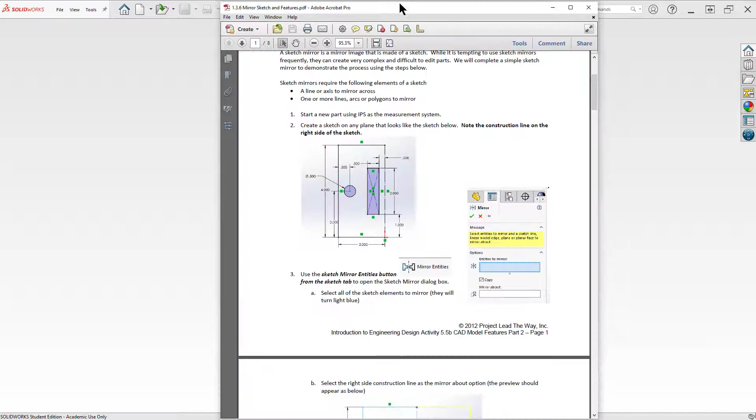We're going to start out by sketching this part right here, just making this little sketch. Now we want to be in inch-pound seconds, and all that a sketch mirror requires is a line or axis to mirror across, and then one or more lines, arcs, or polygons to mirror. So it's really a pretty simple process.

I'm going to go ahead and start File, New Part. I'm going to start a sketch, any plane. I'll choose the front plane. I'm going to go ahead and use a corner rectangle, start at my origin, pull it up and out, and get this thing fully dimensioned.

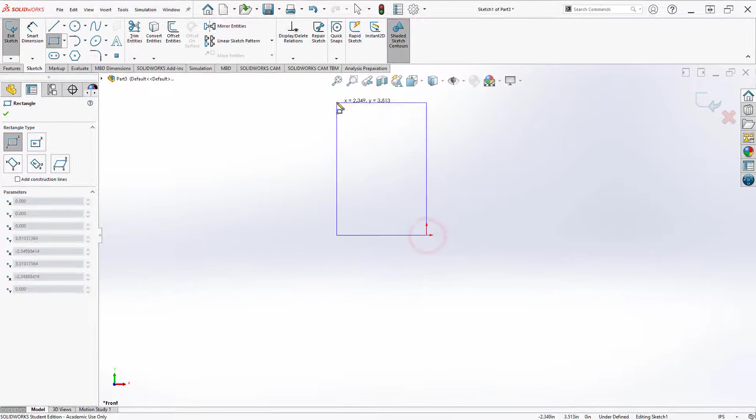I want to do my largest dimension first, that's about 4 inches. I want this dimension to be 2 inches. And I want this line to be for construction. I can click on it and choose construction geometry right here.

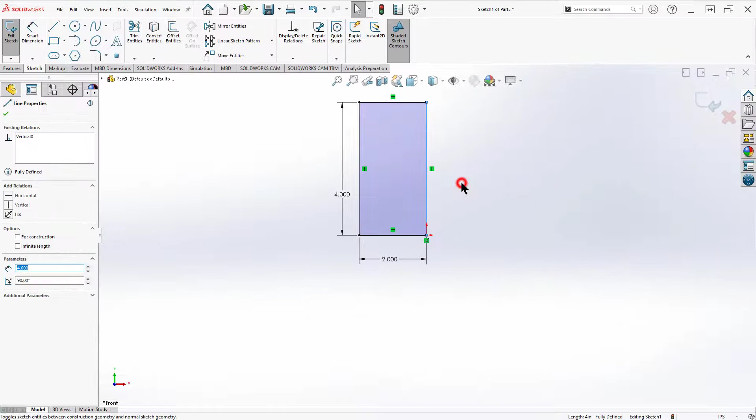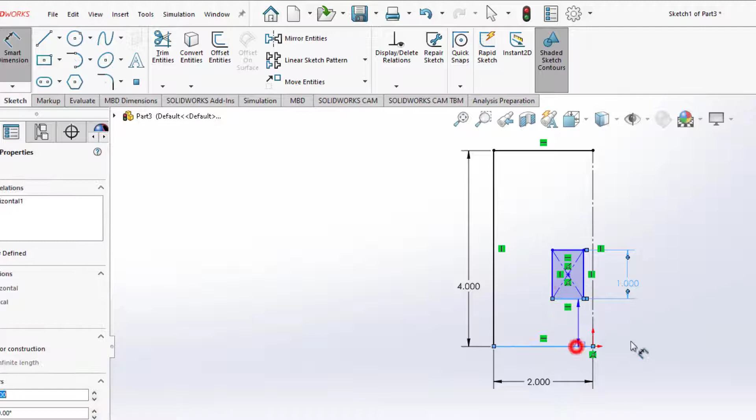I'm going to put a second rectangle. Let's make that a center rectangle, and I'm just going to drop it kind of up in here. Apply a couple of dimensions to that. I want this to be 2 inches tall. I want it to be 1 inch from the bottom. And I just said 2 and I typed in 1. So my bad, I'll fix that.

Should be 2 inches. I want it to be about 1/2 inch wide. And I want it to be about 1/4 inch from my construction line. And I just messed that one up. Hang on a second here. I want to go actually from my construction line to here, 1/4 inch.

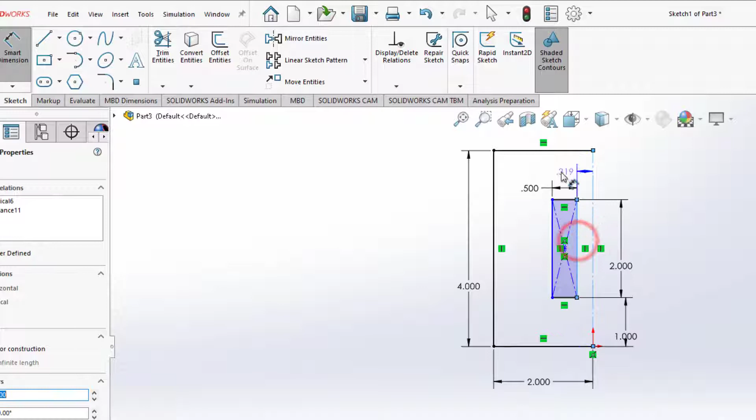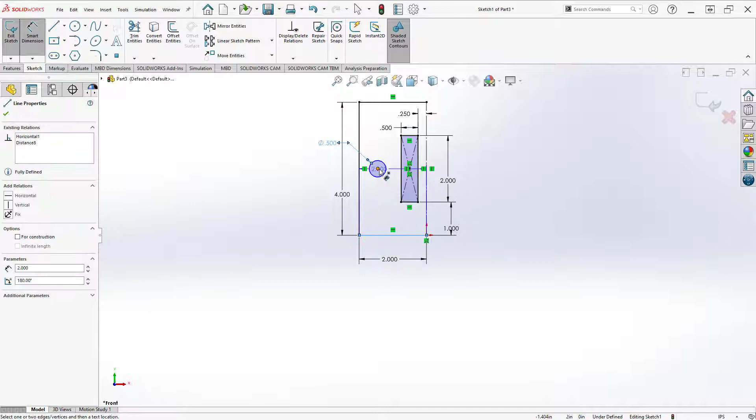Okay, you're going to notice that my sketch is almost done. I want to put one more circle in here, just going to drop this down, dimension the size of this, 1/2 inch. And I want to place it so that it is about in the middle of that, 2 inches up, and 1/2 inch from the edge to the center of my circle.

Now you're going to notice that my sketch is fully defined. We always want to get our sketches fully defined. Remember, we need a size and location for pretty much everything. So now you can see that I can take this simple sketch and I can mirror it.

To do that, in the Sketch tab, so that's an important thing because the menu looks very similar in the Feature tab, but in the Sketch tab, in an active sketch, I can come up here and select Mirror Entities. Now, when I select Mirror Entities, I get this dialog box.

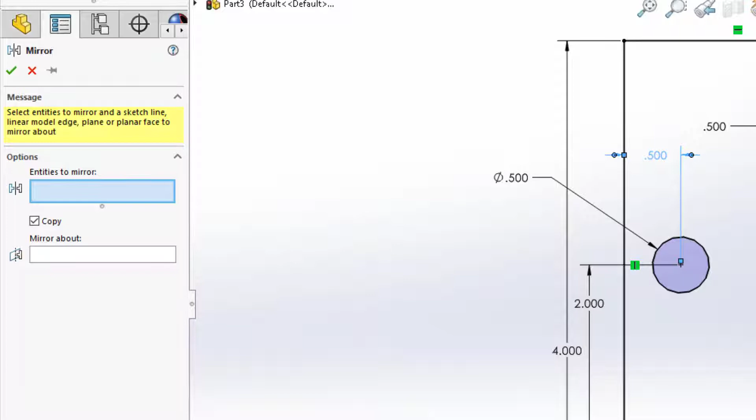First thing it says is, what do I want to mirror? Now, I can go through and I can click these things one at a time. I'm just holding down my Control key and clicking them. It's one way to select it. Kind of painful. So there I've got everything.

But I'm going to show you an even easier way to do that. I'm going to hit Escape, go back, hit my Mirror Entities, and I'm going to drag up and left. Everything that I touch with that box gets picked. Now I don't want to necessarily mirror this middle line here, so I'm going to hold the Control key down and deselect that. Everything's light blue that's selected.

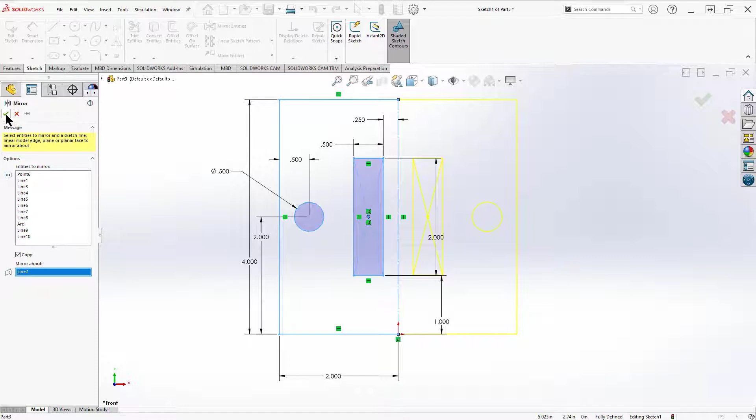Now the mirror axis, the axis that I'm going to mirror about is going to be this construction line. So I've just moved my cursor from my upper box, Entities to Mirror, down to Mirror About. Clicking that, you'll notice I get a preview. Now it's light yellow and kind of hard to see on the screen, but I have a preview of everything I'm going to mirror. I want to be sure that's pretty accurate because it's kind of hard to reverse this. Hit the check mark, and now I've got a mirrored sketch.

And at first glance, it looks pretty good. But one thing that I want to point out to you is you'll see all of these mirror entities. As I hover over them, I can see where the mirror is coming from. But you're going to notice a couple things.

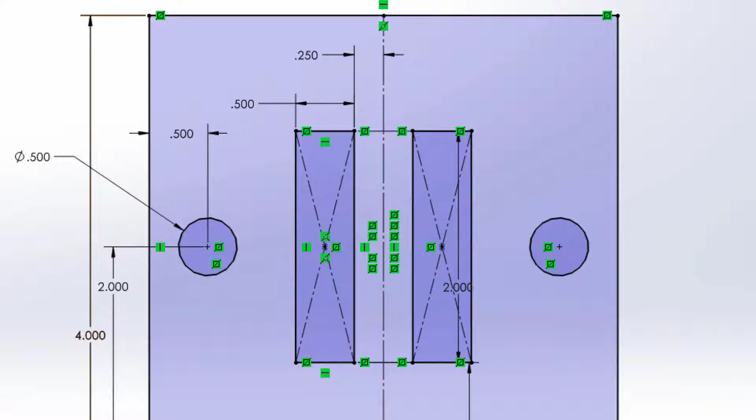If I change a dimension over here on the thing that's being mirrored, 0.75, it'll update it on both sides. But if I come over here to the item that's mirrored, and I try and do a dimension, it'll tell me it's a driven dimension and highlight the other side. So it can be kind of hard to edit these sketches that are mirrored. For that reason, I will tell you that it's probably not the best strategy overall to do complicated mirror sketches. But we can do that.

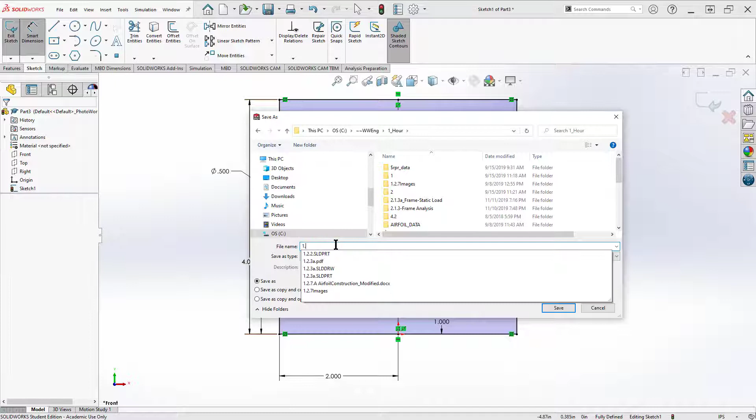All right, that's a sketch mirror, pretty straightforward. Let's start something new.

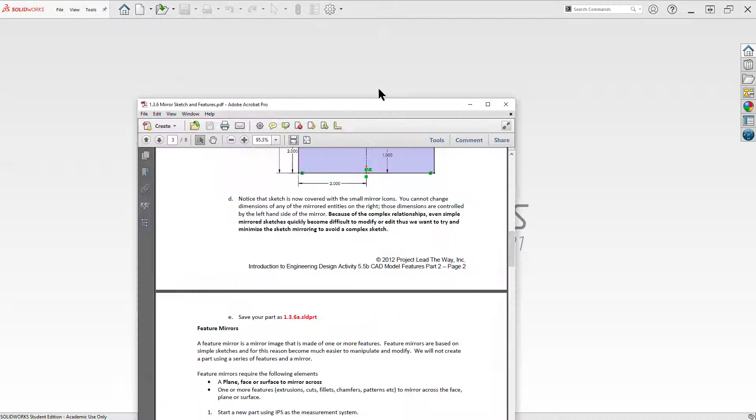This time I can do a similar operation, but instead of mirroring parts of my sketch, I can mirror complete features. This is kind of tricky because a feature mirror is much more powerful. I can mirror across planes, faces, or surfaces, really a flat surface, across any feature—an extrusion, cut, fillet, chamfer, pattern, etc. Doesn't really matter.

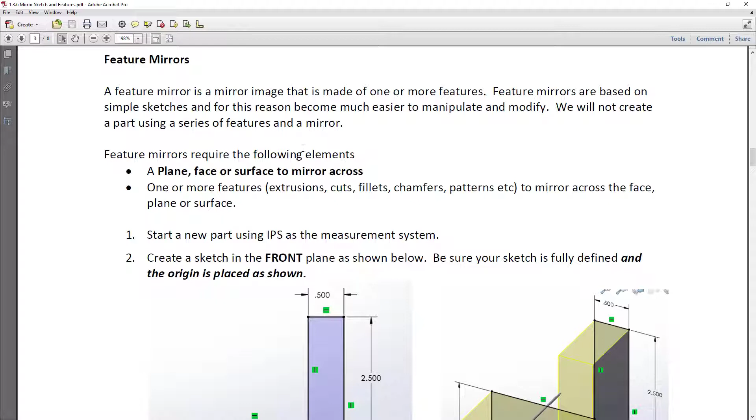So we're going to start a new part. This time I want you to pay attention and choose the front plane. We're going to make sure our sketch is fully defined, and the origin is down here in the lower right corner. You'll see why in just a second. So let's draw this little L.

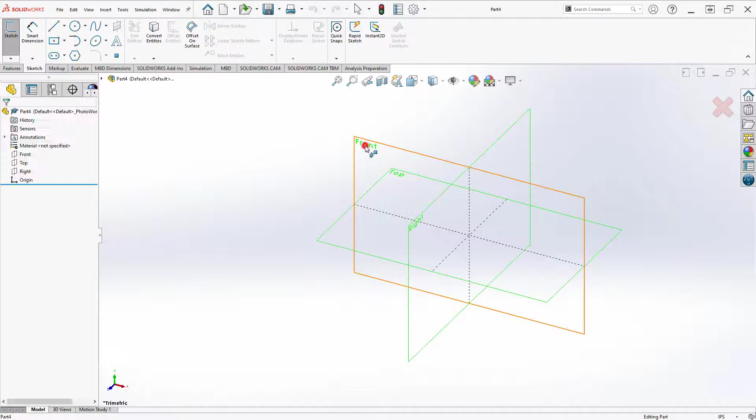Again, File, New Part. I'm going to grab my line tool, sketch in the front plane, and draw a little bitty L. I want it to be vertical, horizontal, vertical, horizontal, lined up to my origin, and be a closed body. Notice my origin is down here in the lower right corner.

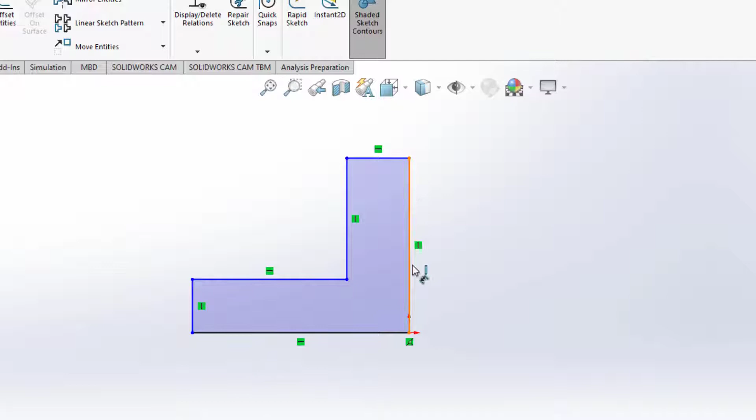Couple dimensions: biggest dimension 2.5 right here, then 2, then 1. Don't worry if it blows up a little bit, grab it and I'll pull it apart. And 0.5.

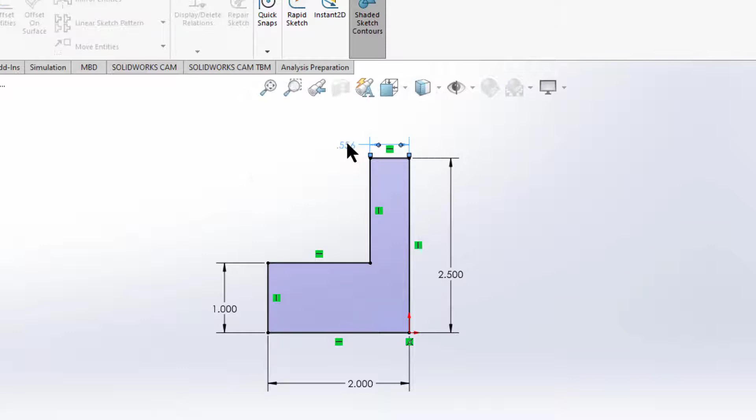Fully defined, looks awesome. I'm going to go ahead and extrude this 1 inch blind straight out. So go Features, Extruded Boss Base, 1 inch. Preview looks good, accept it. This is my extruded part.

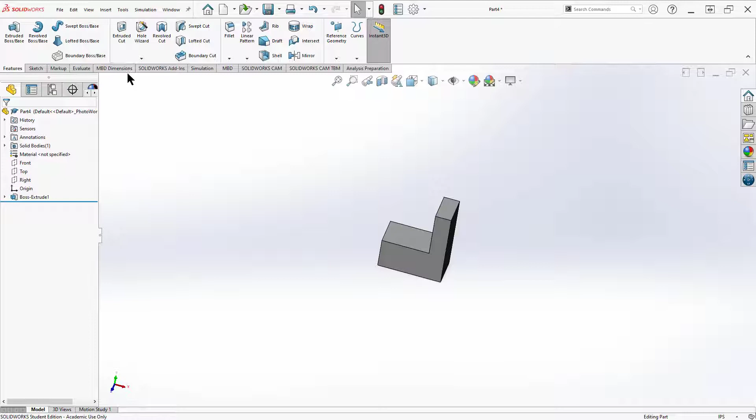Now I want to modify this part a little bit. The first thing I'm going to do is put an extruded cut in the top, with a circle on top. I'm sketching on that using my circle tool, but I want you to learn how to do this properly.

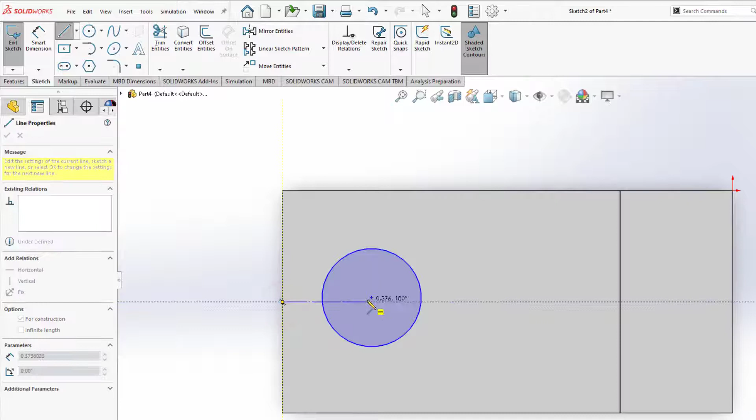I'm going to use a center line to position my circle. Every line has 2 endpoints and a midpoint. I want this to be in the middle of the object, so I'll find that midpoint, put a center line out to my circle, and make that line horizontal. I'm also going to use this line to dimension the location, and I'll make that 0.750.

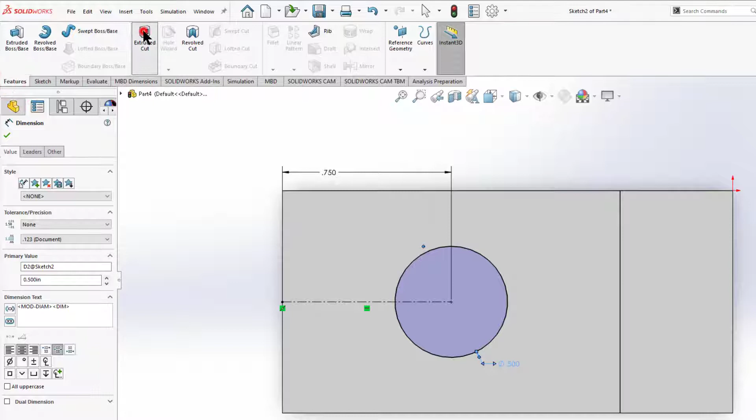And I'll make my circle diameter 0.5. I'm going to go ahead and cut that through all. So now I've got this basic shape.

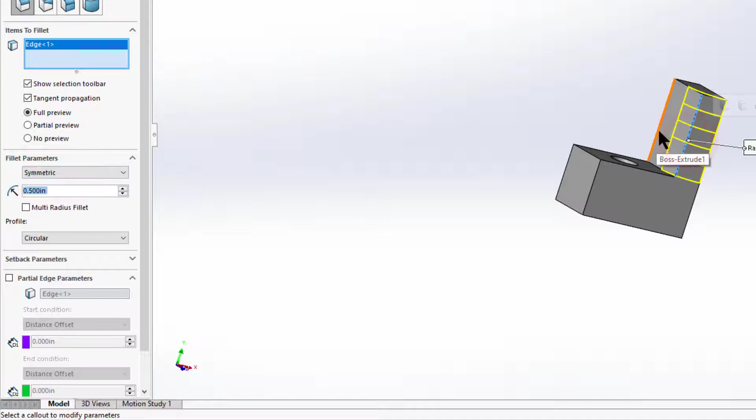One more quick thing I want to do is add a couple of fillets. Grab my fillet tool, set the dimension of my fillet to 0.5, and choose this upper 2 edges, just like that, and the far left 2 edges, just like that. You'll notice it makes that round—another way to make something round. You'll only see that if you have full preview selected.

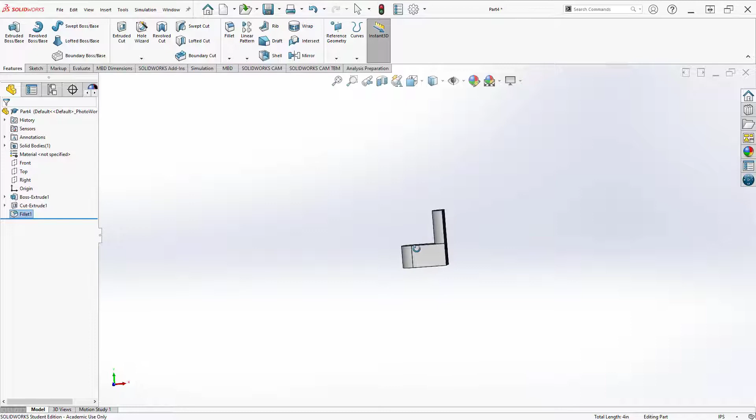So now I've got my part. Now I'm going to mirror this part. To mirror the part, notice now I'm in the Features tab, and I come up here and choose the Feature Mirror.

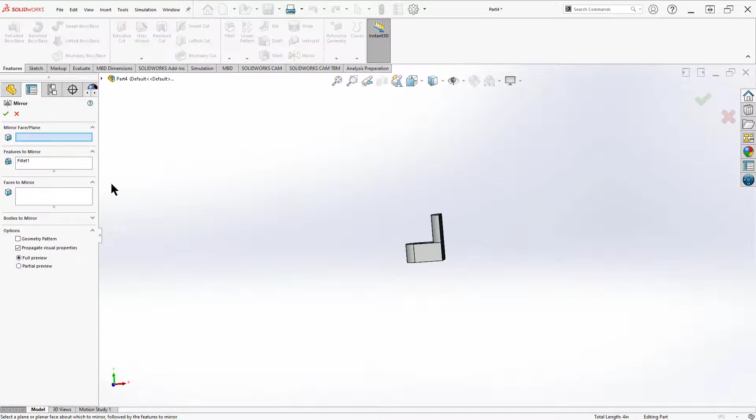Notice it doesn't say Mirror Entities—that was in the sketch. This one just says Mirror. So I'm going to go ahead and click on the mirror. It really asks me just a couple of questions: what mirror face or plane am I going to use?

I will tell you definitively, you're better off to use a plane to mirror around than a face. The reason is if you do a future modification to the part and alter or remove the face you mirrored around, the mirror will subsequently fail. Planes generally don't move within the parts, particularly if they're planes associated with the origin. So if you can plan your part to use one of the planes—front, top, right—to base your mirror upon, it'll be a much more robust part.

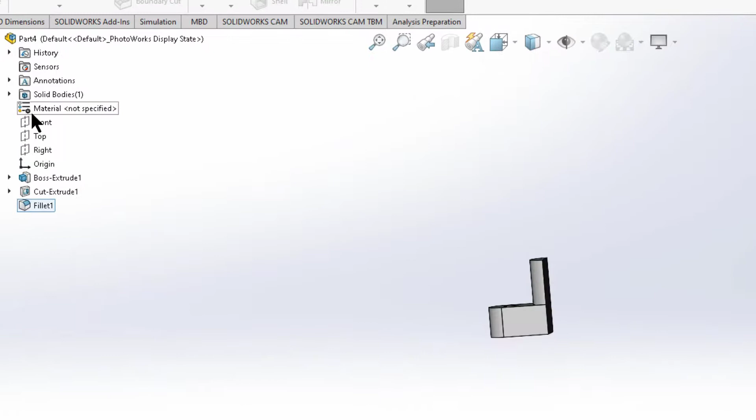So I'm going to highlight this, choose my drop down, and as I hover over my planes, you'll see they appear. I'm going to use my right plane to mirror around.

Now what I'm going to mirror, I just pick off of the list here. I can also click on it in the drawing itself, or the part itself, or click on them down here. But I'm going to choose everything that I just made, and you'll see I get a preview.

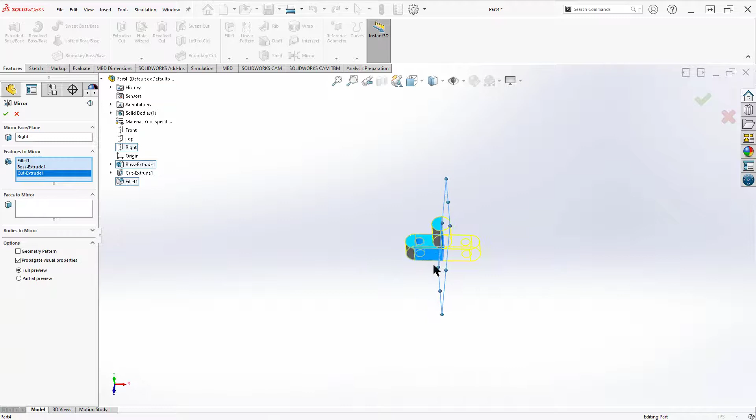Now it's a light yellow, kind of hard to see, but I've got my mirror axis, the right plane, and everything I'm mirroring. Once I'm happy with that, hit that check mark. There's my part.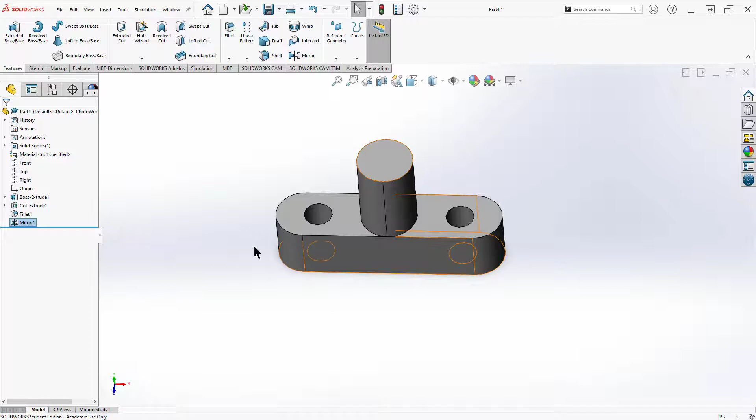Now, if you didn't put the origin where I told you to, the second part won't work. If you did, we can mirror a mirror.

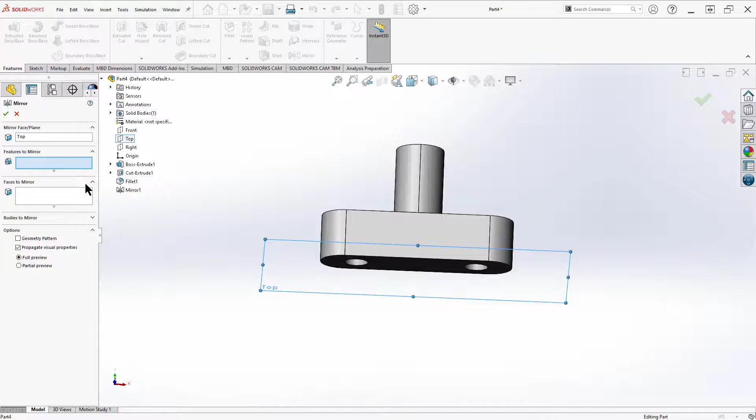So to mirror a mirror, I just click mirror again. This time it's going to ask me what mirror, face or plane, and now I'm going to hover through my model, and I'm actually going to use my top plane. The features I'm going to mirror is the mirror.

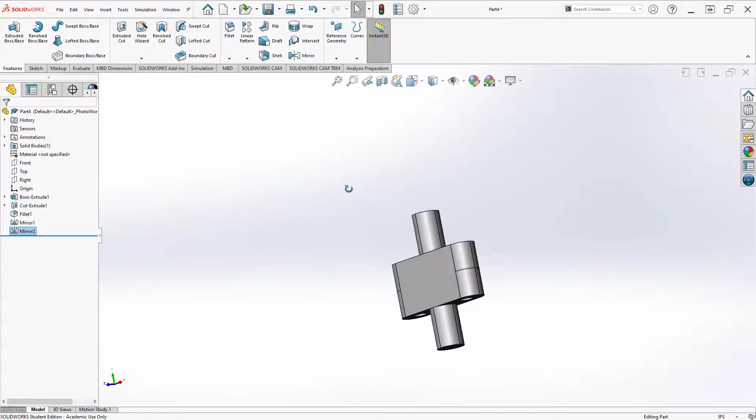You'll see I made a quarter of the part now, and I've mirrored it once, mirrored it twice. So this is very much like a pattern, where we can do a repeat of a pattern. We can do a linear pattern of a linear pattern. And there's my part.

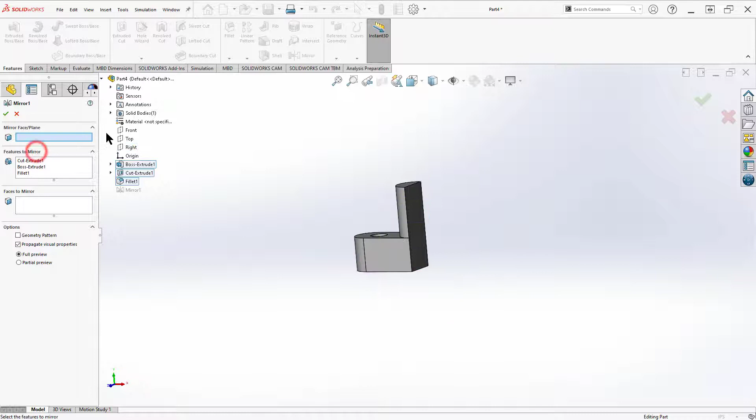Now let me show you a couple things that don't work. Let's go back in time here and delete this second mirror. So I've gotten rid of that mirror, and now let's go back and edit my first mirror. Instead of using the plane, I'm going to use the side of my part. Looks the same, doesn't it? Mirror's the same, doesn't it?

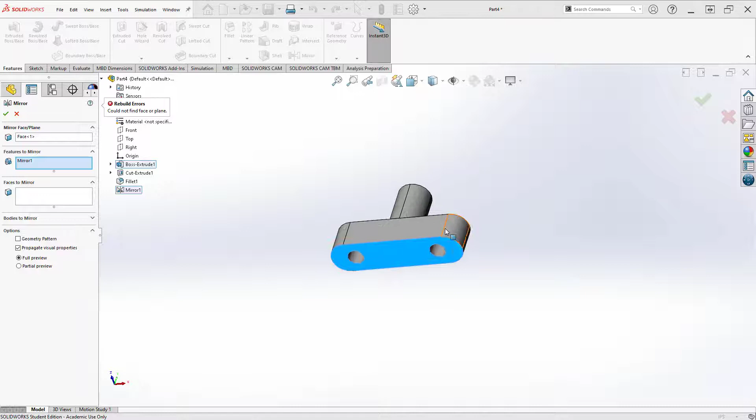But now if I go ahead and try and repeat the mirror, or mirror the mirror, and I choose this bottom face as my mirror, I get that message: rebuild error, could not find face or plane. The reason for that is I'm trying to mirror an entity onto a mirrored plane that does not yet exist before it's mirrored. And that kind of makes sense if you think about what happened in this part.

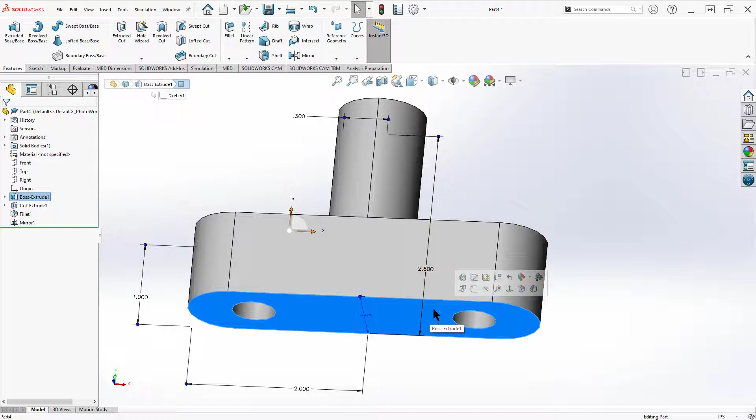So we originally mirrored to create the part you're looking at, but the right half of this mirror plane does not really exist until it's been mirrored. So if I try and mirror that mirror, it's trying to mirror across something that's not yet present. So that's one of the reasons we want to try and use planes all the time.

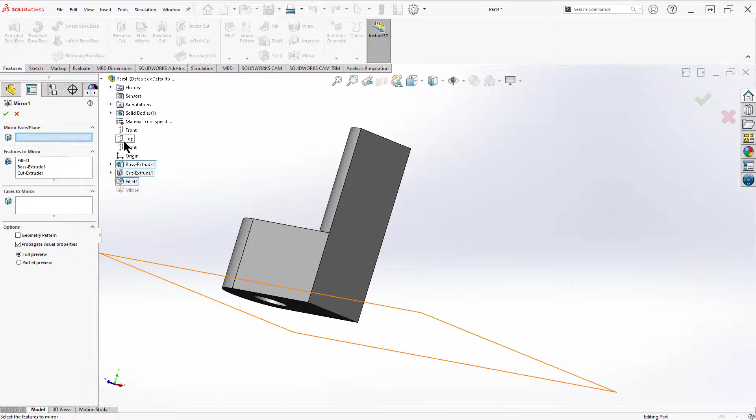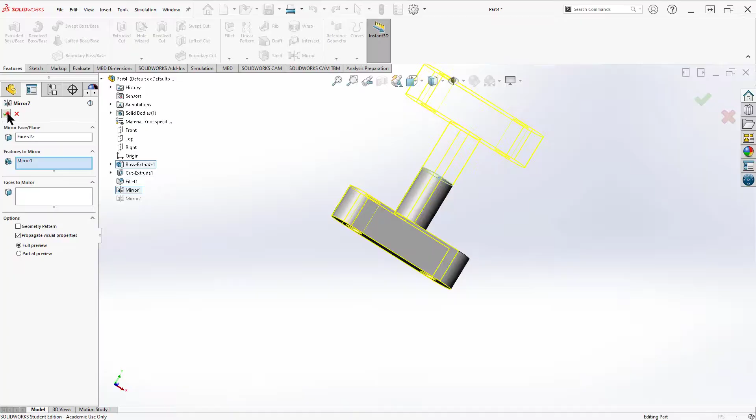So the fix for that is to go back into this mirror. Instead of choosing a surface on the part, choose a plane that's in the part. And now I've got a much more robust mirror, and I can mirror everywhere. There's a mirror. I can go back and edit this. I can change where I'm mirroring now. I can mirror across the top there. And you can play around with this and get many more permutations out of it.

What I would like you to do, though, is I'd like you to submit just this part right here, the very simple mirror part. Now, before we submit it, let's do one more thing. This time we're going to change some material.

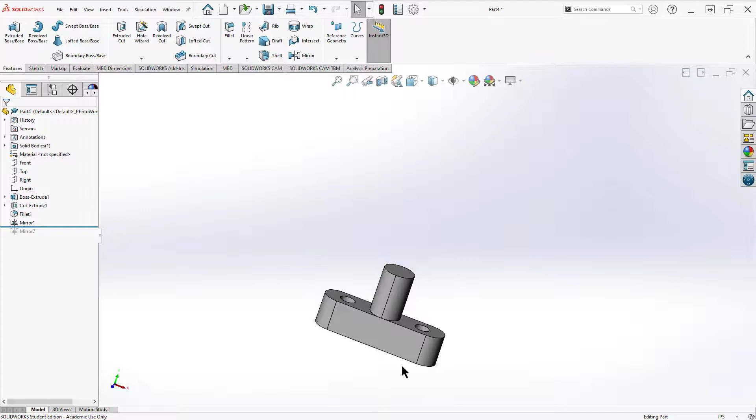Changing material does a couple of different things. It changes the physical properties of the part. One of those physical properties is the density of the material, and that will affect the weight of the part. It changes a bunch of other properties, such as the material strength, its thermal coefficient, its capacity to hold heat, and a lot of things that we do in analysis in Solidworks that are beyond the scope of this course.

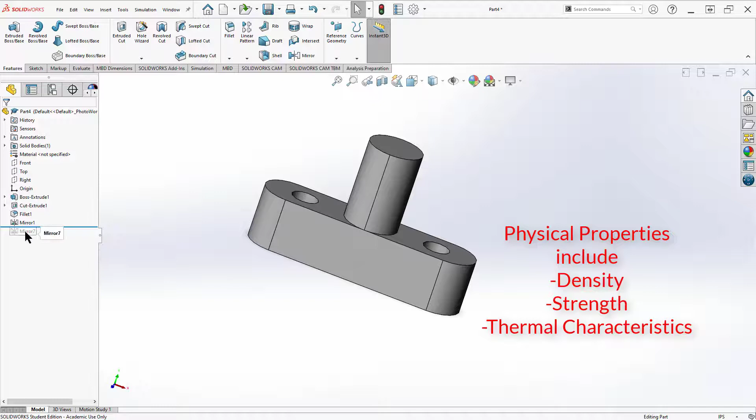But for right now, what we're going to do is we're just going to go ahead and assign a material. So let's do that. To assign a material, what you're going to find is up here in the Feature Manager design tree, you're going to see the word material. And by default, it says not specified. That assigns the mass of water, 1 kilogram per liter.

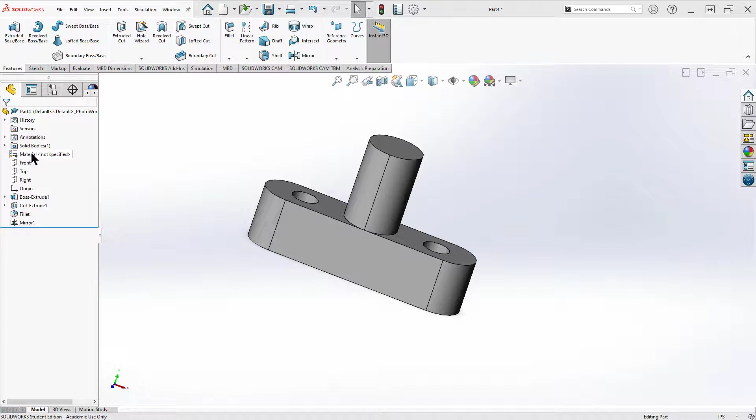So just basic water. And to change it, I want to right-click, and I'll come up with a menu. Now we've got some favorites here, and you can modify these and change these. I'll show you how to do that here in just a second. But predominantly, we're probably going to do Edit Material. So right-click, click on Edit Material. This will bring up your material dialog box.

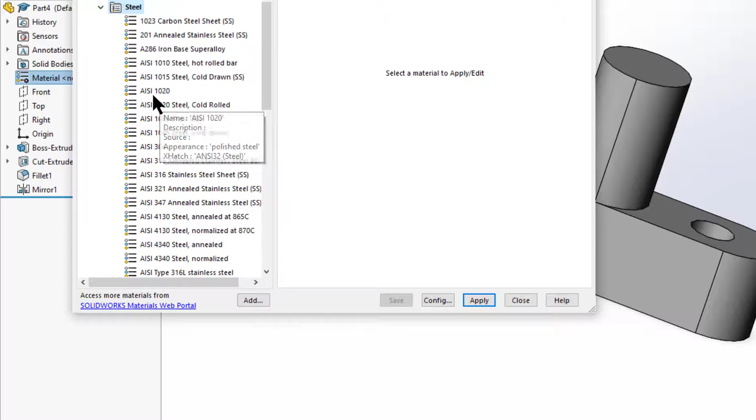And I ask you to make this AISI 1020 steel, right here where my cursor is flashing. When you click on it, you see the characteristics that are assigned to that particular material. In this instance, I've got an elastic modulus, a Poisson's ratio, shear modulus. These are physical strength characteristics of the material.

Mass density, that's how much it weighs per cubic meter. Tensile strength, compressive strength, yield strength are all, again, physical characteristics of strength of the material. And then some thermal stuff down here, including specific heat, and if there's a damping ratio, there isn't for this.

So to apply these values, I just hit the highlighted Apply button. Now this is going to change the physical characteristics of the material in addition to changing the material appearance. You'll see it slightly change color.

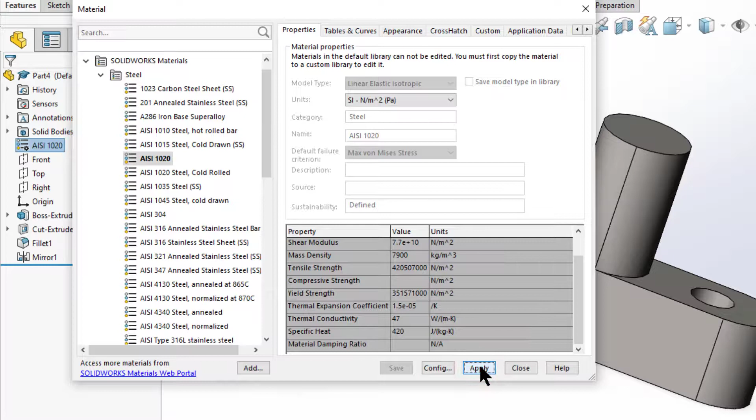For a more dramatic change, you can come down here, and I'm going to do a copper alloy and use brass. And I'm just going to apply that. You'll see that makes the part look like brass or look yellow. So that's an example of how to change the material properties.

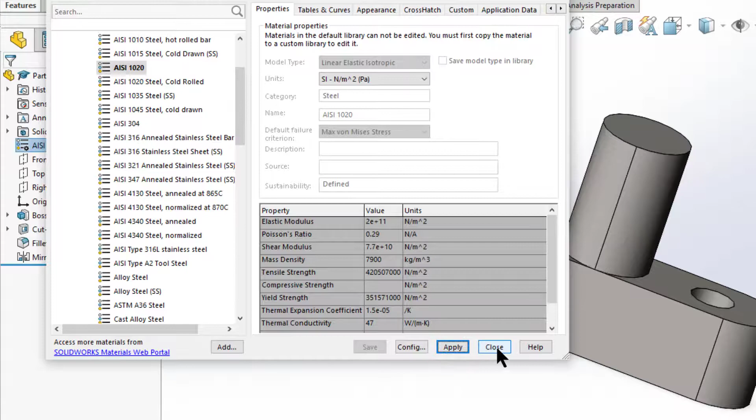Go ahead and assign it AISI 1020 steel. Click Apply and Close. Now when you come up here and you go to the Evaluate tab and you click on that, you'll get Mass Properties, and right here you'll see the value of the mass of the element. It's 1.3 pounds in its current configuration, and you should have that.

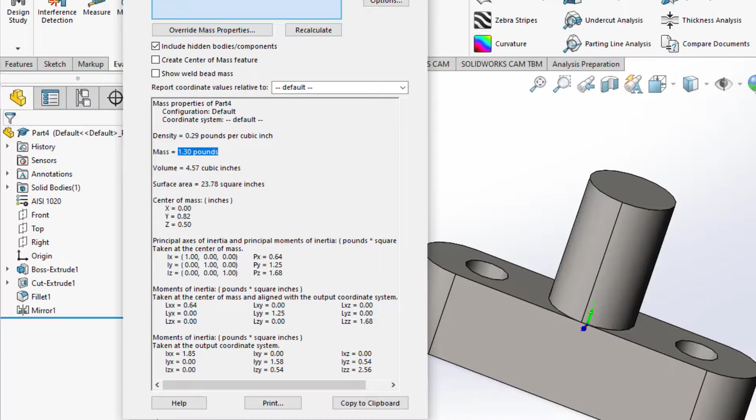So that's a real quick tutorial on how you do mirror sketches, mirror parts, and assign material. We'll assign material for most of the rest of our parts. That's all for now. Thanks for watching.